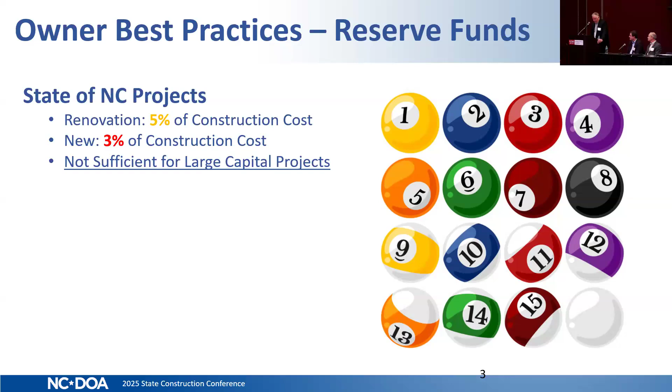A happy face on the scale factor on these large projects is we all know what economy of scale means, right? You buy one Ford F-150, you get a price. You buy a fleet of 100 Ford F-150s, you get a much better unit price, right? Economy of scale. Well, the other side of that coin is the penalty of scale. That's what large projects face.

There are some things that we divide equally from their own perspectives. We divide things like means and methods. As designers and as owners, means and methods are the contractor's or the construction manager's point of view and responsibility. On large projects, it can't be. It can't be. Bring them on early, keep them forever, have open communication, be smart about what you do, because that leads right into costly things that you will never see.

I've got some notes I need to take, yeah.

All of our contingencies are for one purpose and one purpose only: that's minimizing your risk, right? Designers have contingency for things that they don't know, that they know will crop up. They're known unknowns. Contractors have contingencies because market fluctuations and the risk of being a contractor is certainly not any less now than it has been in all of our careers. And the owners have contingency to reduce and address risk factors from the owner's perspective.

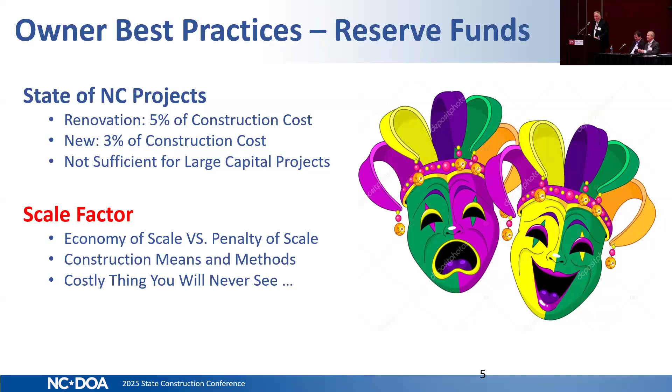One thing you get on big projects these days is maybe the single most innovative and most valuable thing that we ever do, and that's building information modeling, clash detection, and resolution - the software. Typically it's done by the subcontractors and the contractors, and they coordinate it on site.

Our design team did it, and then the contractor and the CMs did it again and did an excellent job. I can tell you that designing your building before it's finished design, using the BIM modeling, will pay you so many dividends. From an owner's perspective, it's errors and omissions, right?

These are big deals. These are 18, 22, 24-inch pipe, chilled water pipes going laterally for 300 or 400 feet. And there's 4 or 5 of them, even numbers, 2, 4, or 6, right, Dave? They never come in odd numbers. Loops don't work really good with an odd number.

Yeah. So think about that BIM modeling done as a basic service, or even as an additional service that the owner was willing to pay for during the design phase. It really makes a lot of difference. It'll give you a better cost estimate, right? It'll give your budget some relief and predictability, because those systems really are expensive and you just don't see them.

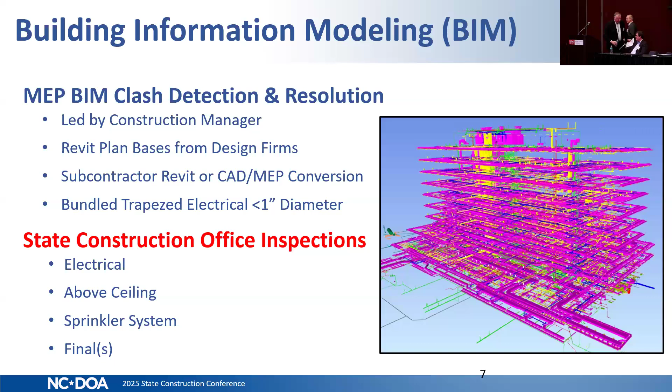Thanks, Will. So from the most simplistic definition of a high rise, you're talking about a building that has an occupied level that's 75 feet, not above the ground, but above the lowest level of fire department vehicle access, right? And so that is all based around where the fire truck is going to come, they're going to park, and with a ladder truck, how are they going to get to that highest level? So it seems simplistic, right? But not all projects are so simplistic.

You have to work with the local fire marshal to understand how they are going to fight that fire. And so while the state construction office is the ultimate say and the AHJ that gives you the thumbs up or the thumbs down on how you've planned something, a lot of the times they will defer to the local fire marshals to make sure that we're talking with them.

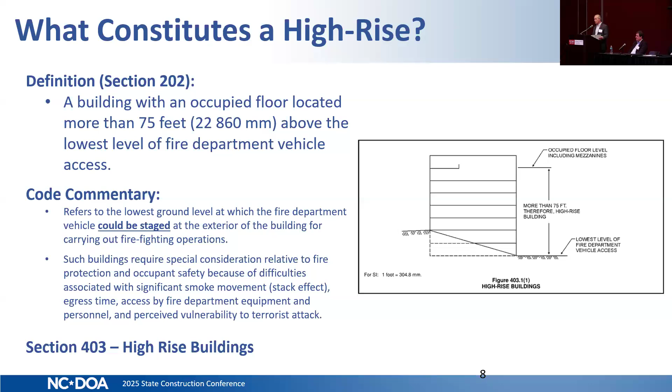As an example, at UNC, the Kenan-Flagler Business School, we did an addition. So the building right in the middle of the slide is the addition. It actually attaches to a parking deck. So the parking deck and the addition become one building, and it bridged over Kenan Drive to the south to attach to the McColl building. At the time, we were trying to figure out were all three of those structures going to be looked at as a single building, in which case it would add a whole other complexity to things.

But to add to that, the parking lot to the east, we'll call that baseline elevation 0. And on the west side of the addition was a big ravine, actually, where a stream came down, the park to the left. That was also at baseline elevation 0. We knew our addition was going to be higher than 75 feet above those 0 baselines.

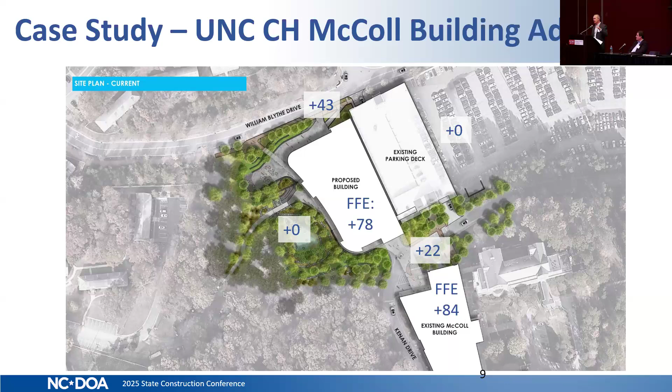When we met with the local fire marshal, they said there's no way that we're going to come and fight a fire through the parking lot. We would come to the road at the top, Blythe Drive, which is 43 feet above baseline, or Kenan Drive between the two buildings, which is 22 feet above baseline. So when you consider that, those trucks are already high enough above ground or above that 0 foot baseline that they can get to the highest level of the occupied floor, much less than 75 feet. So we're able to avoid having to kick ourselves into that high-rise designation.

This is just another look at it. Blythe Drive is in the foreground at 43 feet. They're only going up 35 feet to get to 78, so well below the high-rise determination.

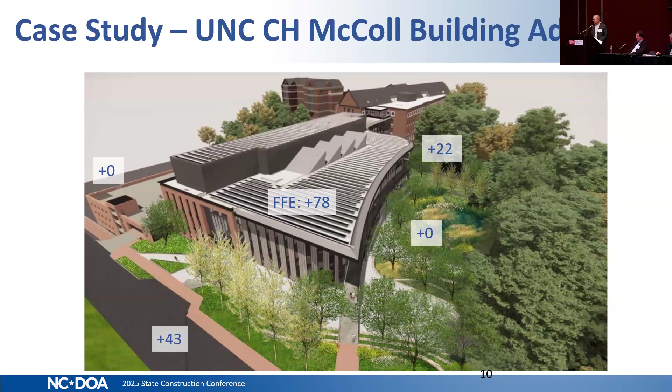So, a group that you may not normally think about as being an AHJ, but they do have authority, and they have a lot of authority. Michael Shumsky referenced this in his comments this morning. But when you've got a high-rise building, you always need to think about contacting the FAA or going through their process. So they have a form, the 7460 application, which is generally required when you're within 20,000 feet of an airport or have a building over 200 feet tall, but not always.

So you go onto their website, you fill out this form, you submit your coordinates. You can get those off Google Maps. You enter your grade above sea level. You enter how high your building is going to be. And then it spits out and it tells you if you're actually required to submit your building for them to review.

So you know you're having a bad day when on a Friday afternoon you get a letter from the FAA saying that your building is 9 feet too tall. And we were 35,000 feet away from an airport, and the building was only 185 feet tall. We had figured out late in the game that the crane was actually going to be over 200 feet tall, which kicked the contractor into having to submit for a permit through the FAA for their crane. And as part of that, they came back and they said, hey, we need to submit the 7460 for the building too. So we submitted it.

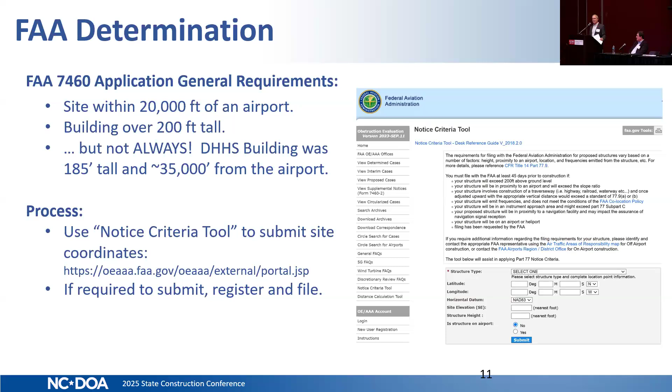2 months later, we get a letter from the FAA that says we're 9 feet too tall. The worst summer ever. Yeah, and then you have to call this guy.

Not fun. But anyways, I'm not going to go through this whole timeline, but after we were notified from the FAA, their reasoning was not that our building was too tall or we were too close to an airport, but that we were going to block some of their radar. You know, there's a helipad right next to where the site is. We weren't sure if that was going to be part of it. It wasn't. But it was because the building was going to block their radar and we were 9 feet too tall. So after we got the notice, 2 months after we submitted, we said we wanted to appeal.

They said it was going to be 45 days. We said, that's fine. 45 days came and went, then it was 2 months. Called them. They said it's going to be another month. Called them, said it's going to be another month. So they do not stick to their timelines. Let's be clear with that.

So it was about 10 months later, after contacting them many times and actually having a meeting with Will and Michael Shumsky to talk through what the issues were, that we were finally given the go-ahead to proceed with the building as designed. We were literally hours away from pulling the trigger and trying to take 8 inches out of every floor to get the height of the building down to get under that 9 feet. So you don't want to be stuck in that point.

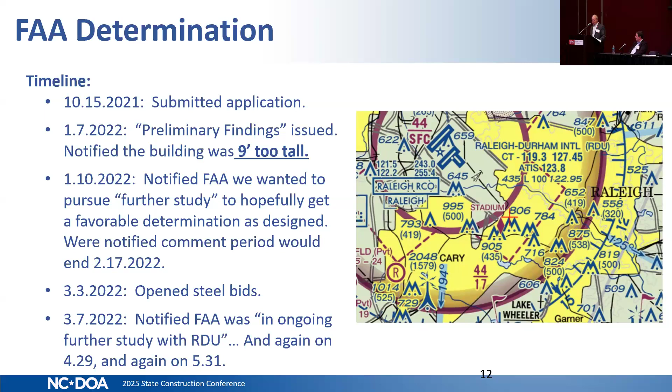Just be sure if you're going to do anything even remotely close to an airport that's got some height to it, submit that form. The fun thing, we were already under contract with the steel contractor going through shop drawings. So if we needed to change everything, it would have been a real big deal.

Again, coordinating with your local AHJ or the local fire marshal on campuses with multiple buildings. DHHS is an example. It's a parking deck, and then the central plant and tower are connected. So 2 buildings on site. We actually looked at those as a single building. You can do that when those buildings are in close enough proximity to each other. But we needed to know where the fire marshal was going to come and fight a fire from.

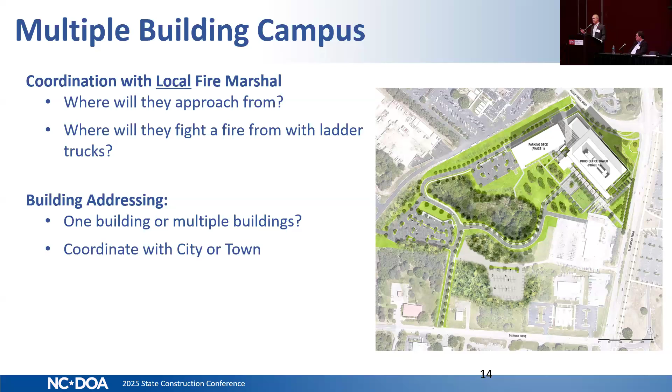And so we worked with them, figured out where they were going to approach the project from, where they would fight a fire from. It helped us figure out where we need to design turnarounds for them, what needed to be rated for fire trucks, where we needed to locate FDCs and so forth.

So they determined they wanted to come in right off Reedy Creek Road. The fastest place that they could get in was in a secure service access area. And so it was right near the fire pump room. And so we had to figure out all the stuff that was needed for them to come and do that.

This isn't unique to a high rise; this is just something that you need to do as good practice with all of your buildings, meeting with the fire marshal first. And they appreciate it. They say, we're not the ones that will give you the final approval. State Construction still gives you the final approval, but it goes a long way.

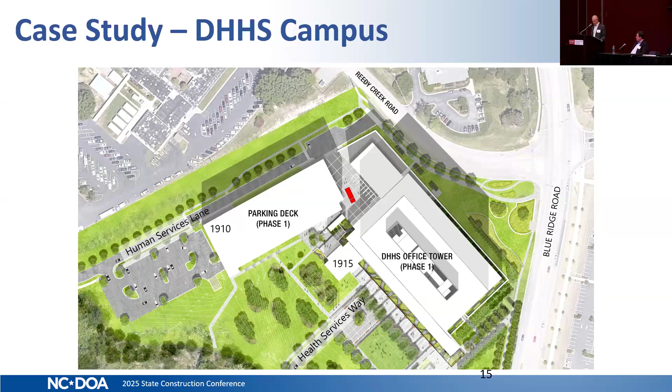The fire command room is required when you have a high rise, and just in general, this is the room where the firefighters come to first so that they can monitor all the building systems, they can control the elevators. So all the rest of the time, it's just a room that sits there ready for an emergency for the firefighters to use.

And the important thing here is also to talk with that local fire marshal to figure out where in the building they would prefer that room to be. And it's not going to be the same answer every time. The city, again, they'll leave it back to State Construction to give the final word.

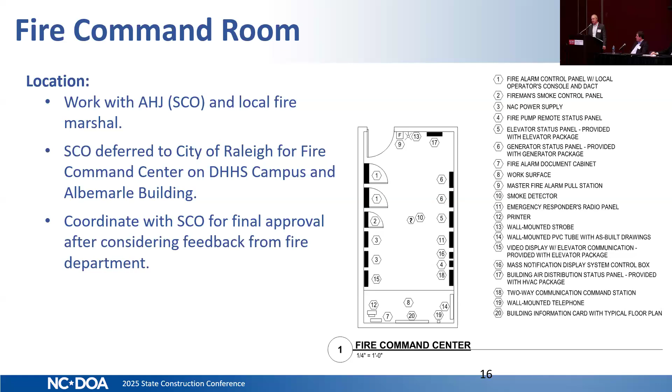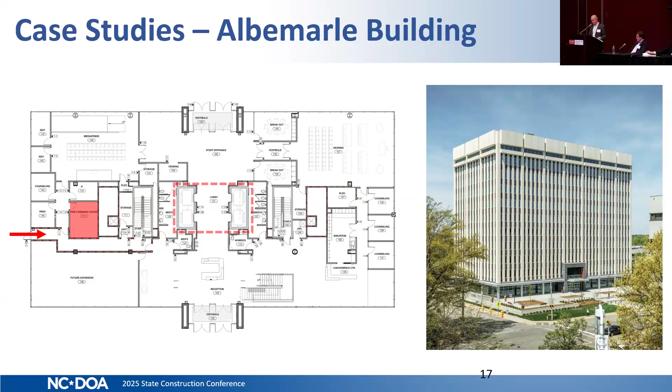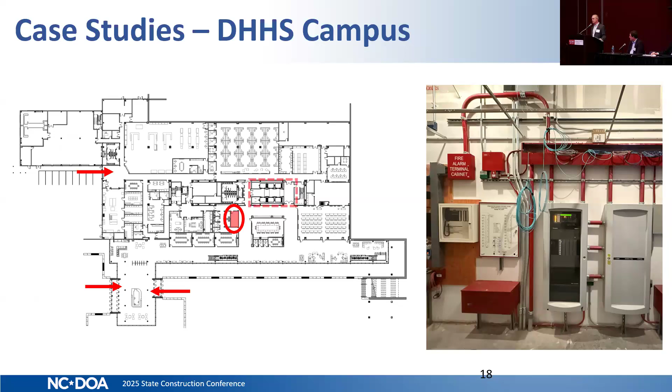All right. So when the fire department arrives at the building, they're going to need to take into consideration what the condition of the building occupants is and how that relates to how they fight the fire. Most buildings that are not high rises, they're not of this magnitude. When the fire alarm goes off, everybody evacuates and you shut down all of the building HVAC systems to avoid migrating smoke from one floor to another.

If it were to be appropriate to leave some folks in the building, of course, this comes into play in healthcare and other institutional occupancies. But in a commercial building, if you were to try to keep some of the floors operational, that has significant implications to how the fire alarm system operates and in turn how the HVAC systems in the building need to respond. In this case, for DHHS, we did not end up trying to keep anyone in the building. It was determined it's appropriate to let everybody evacuate on a fire event.

Now, a large government building has other emergencies that can occur aside from a fire. NFPA actually has a risk assessment that you can work through. It's a work form where you sit down with the owner and talk about what risks, what threats to the building need to be taken into consideration. It can include wildfires, seismic, active shooters, things like that.

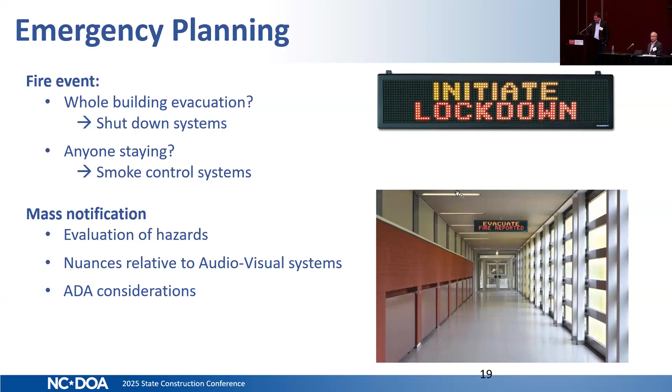All right, this next topic is near and dear to my heart, so I'm going to speak to it for a few minutes. Not specific to DHHS because we avoided some of the issues, but I've done this at least a dozen times successfully, and I have a few hard life lessons related to pressurization systems. I'm going to tell you how to avoid those.

Stairwell pressurization is required for any high rise, particularly for stairwells over 75 feet in height. If you have low rise stairwells that just connect a few levels, they are not required to be pressurized. But pressurizing a stairwell is a very straightforward thing. If you can imagine any door, the gaps around the edges are fairly well defined. The only real variable is the undercut of the door. We as engineers can do some simple math to determine how much air it takes to pressurize that stairwell and keep it free of smoke so folks can evacuate the building safely.

To make an analogy on how difficult it is to pressurize an elevator hoistway - I'm not going to embarrass myself by doing this with my face, but I'll paint a picture with my words. Imagine blowing out birthday candles on a cake, the face you would make, what the air looks like. Then imagine opening your mouth wide and trying to do the same thing. How much force are you going to get from your breath? That's what we're dealing with in elevator hoistway pressurization.

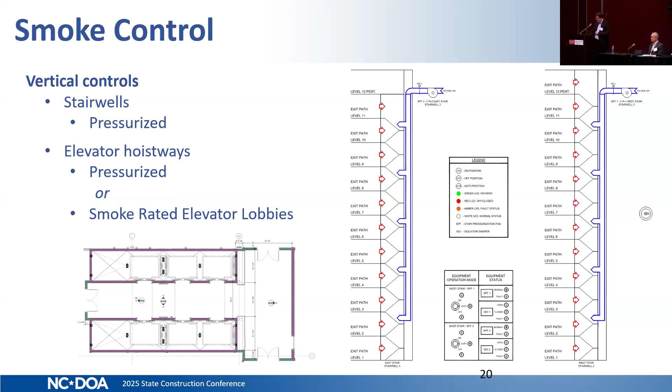This topic is not specific to high-rise buildings, but high-rise buildings are often of the scale and magnitude that they need this type of system: emergency responder radio communication systems. There are so many acronyms for this, it's confusing. This is a way for first responders to talk to one another in the building. It was added to the code after 9/11 when there were transmission issues in buildings.

High rises have three factors that make this type of system likely to be needed. The footprints are often very large, so you have more walls obstructing the signal. They typically have a good deal of glazing with low-E coatings, which also blocks RF signals. And when you're digging out the foundations, you go so far underground that you have basement levels where these signals can be obstructed.

You don't really know if you need this system until you go out and test when the building's constructed, and by then it's too late. So you need to plan for this system up front. You need to identify a spot where the antennas may need to go outside, a room inside that's 2-hour rated where the head-end equipment can go, and vertical pathways for the cabling. If you build in that infrastructure, you're ready to go if the system is needed.

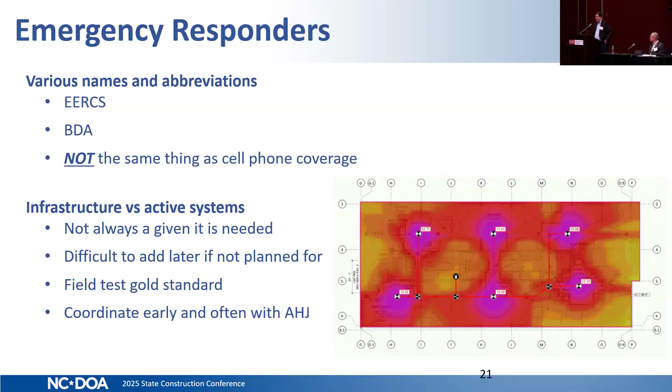One of the success stories of DHHS was a very intentional effort to have the program stack vertically. The core is very efficient. We were able to locate the mechanical, electrical, and telecom rooms where we only needed one of those on each floor plate, which allowed a great degree of flexibility out in the floor plan.

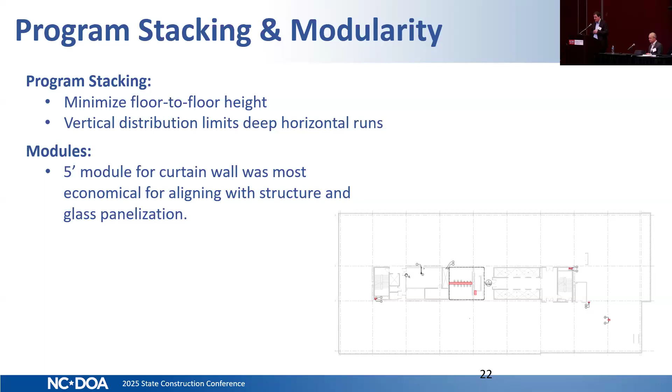When we get to the envelope, specifically your glass and glazing system, you've got options: tempered glass, heat strengthened glass. You can't use heat strengthened everywhere. I think tempered glass, at least in our firm, is generally what we try to use everywhere, unless there are different situations that require thinking differently.

Tempered glass is stronger than heat strengthened—about double. But the interesting thing is that the industry allows for a certain percentage of tempered glass to spontaneously break. It's caused by nickel sulfide inclusions that you can't see with your eye. They get baked into the glass, and when those pieces of glass are out in the field and get hit by the sun and start to heat up, that tempered glass will spontaneously break. You'd think that would fall under a warranty issue, but it doesn't—it's actually industry standard. They write it in their contract, and the owners end up paying extra for it.

The cost difference between tempered glass and heat strengthened glass is really not that big. With tempered glass, you can actually heat soak it—they heat those panes up in the lab to a high temperature and then let them cool down. It's meant to mimic the same conditions you'd get when the sun hits those panes in the field and causes them to spontaneously break. It catches most, but not all. The important thing to know is that the state is really risk averse, so when you tell them there's a chance the glass on the outside of the building could break, that's not something they want to hear.

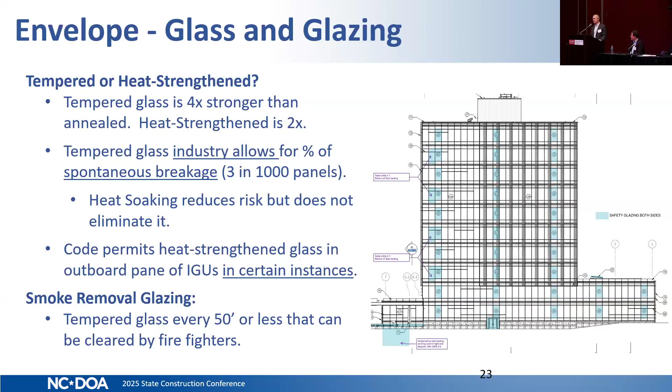Code permits you to use heat strengthened glass in a lot of areas on the outside of the building in high rises. If you see the diagram on the right, the blue panes are the only panes on the DHHS building that ended up being tempered glass, because the rest could be heat strengthened. The tempered glass was required for smoke removal. It's a code requirement, and every 50 feet or less you have to have panes that firefighters can easily crack to get out for smoke removal. So have those conversations early with your client to understand their risk and their appetite for that.

For the record on DHHS, we did every manipulation of the glass envelope available to mankind on this building, because some of you might remember just a few short years ago in downtown Raleigh, we had a state building where a lot of people had fun with it—they had innumerable panes of glass take off and fly to the ground. They did not do it like we've done it. There is no 100% solution. Almost every building has a significant amount of glass, and there's still a 0.3% error factor. So if you have 1000 windows in a large building, it wouldn't be unusual to have 3 of them have an issue with the glass. But we did everything we could—we heat soaked every piece of glass out there.

Especially on high rises, our firm tends to go with unitized curtain wall systems—it's something we do most of the time. I noticed on the Pendo building in downtown Raleigh, when that went up, it was actually stick framed. I don't know the reasoning behind that, but you'll see both done. We think the unitized systems are much better—they allow you to dry in your building a lot quicker because those units are fabricated in a shop where you can control the conditions, so you get better quality. Some things to be aware of: there's a limited supply chain for those, and the firms that can do it have different details. So if you have a basis of design and two equals, you're going to be working with at least three companies to figure out their details and baking those into your drawings.

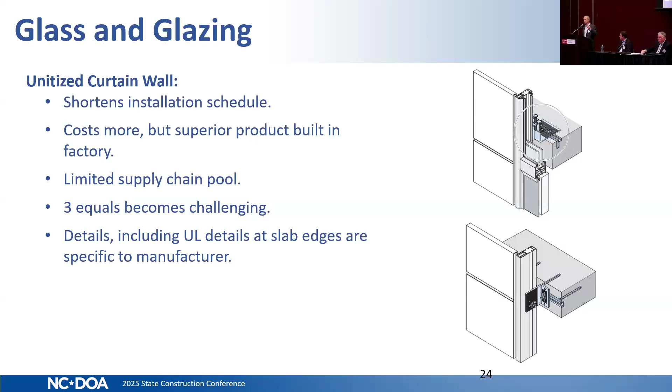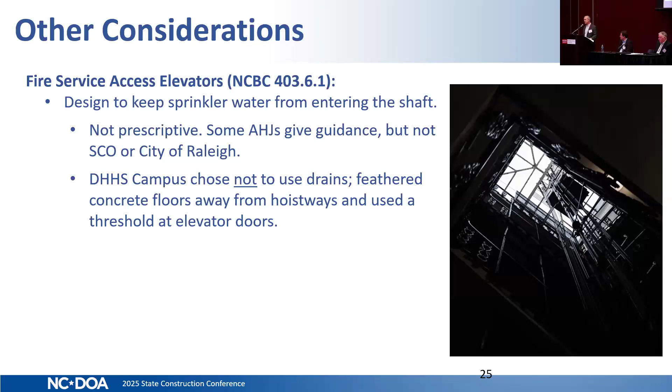I mentioned the fire service access elevators earlier—those are the elevators that return back down to the ground floor, typically wherever the firefighters want them to return to, so that when they get into the fire command room, they can control those elevators and get into the fire service access elevators quickly to reach wherever they need in the building. One interesting thing is you have to design your elevator lobbies so that when the sprinklers go off, no water actually gets into those shafts. So you either have to design some sort of handicap accessible threshold—in the case of DHHS, we tapered the concrete away from those elevators, so subtle you'd never know it just walking through the lobby—and we added a bit of a threshold as well to help with that.

Again, related to egress pathways in the building and systems related to those: if you have a building like DHHS where each floor deals with sensitive information, the floors are locked from the stairwell side. Once you go into the stairwell, you need to work your way down to the exit point of the building unless you have a card giving you appropriate access. When the stairwell doors are secure, you have to have a means of communication in the stairwell in case someone gets trapped and doesn't know how to get out. So every 5th floor in a high-rise building, you have these audio call devices in the stairwells.

Additionally, this isn't just a high-rise thing—this applies to any building four stories or more. Current code requires communication devices in all elevator lobbies. This ends up being a multi-trade coordination issue because it has to have appropriate signage, and elevator lobbies are typically a high finish area. So the design team on the engineering and architecture side has to carefully coordinate where these are located and what the signage says.

Paul, can I add something to this? Yes, sir.

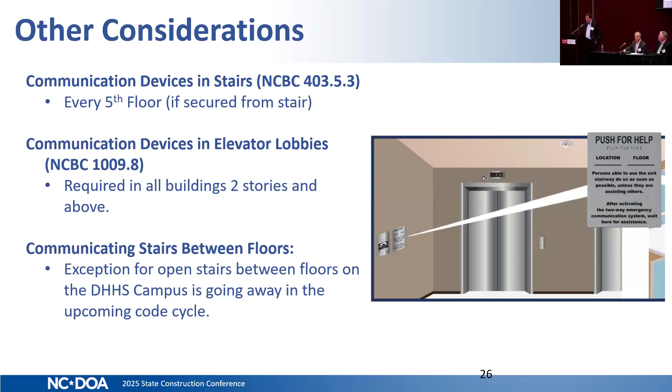This next topic was very much a Bob topic, so I hope he catches our next session. This is not specific to high-rise construction, but large buildings have lots of large motors operating at variable speeds, and when you have that, you have the potential for harmonics in the electrical system. Harmonics, for non-engineers, is a dirty waveform that can cause issues like flickering lights and sensitive electronics not behaving as intended. On top of the variable frequency drives serving our HVAC motors, LED lights actually impart some harmonics, as do all the computers and laptops in the building. So this is a growing problem where harmonics issues are being observed more often, even when a VFD harmonic study indicates it may be okay.

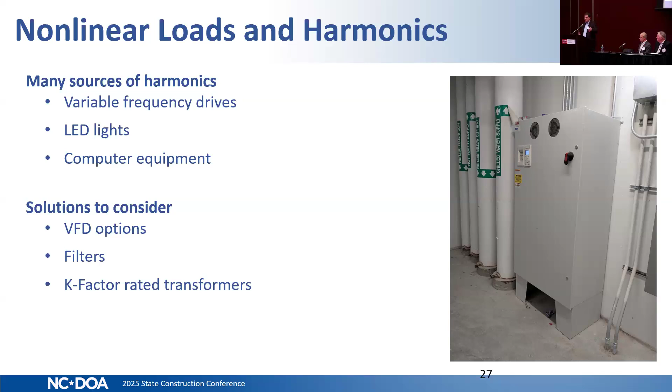So what state construction would like you to do as a designer is a preliminary study. Now, it is specific to the vendor and the drives you're going to get, so of course in an open bidding process you don't know exactly what you're going to get. But you can work with a VFD manufacturer to get specific information for your project, what the layout may be and what the impacts are likely to be to your building, so you can fold these provisions in and avoid surprises later.

Just a couple other parting thoughts before we wrap up and take questions. A couple other considerations: the luminous markings you see in the stairwells of high rises are always a fun challenge. They don't ever look great, but know you're going to have them. They run down the tops of the handrails and are on the nosings and risers of the stairs, so that in an emergency those glow in the dark and people can find their way out.

The other thing is to think about window washing. Most projects, we don't think about that because they can wash the windows from the ground. When you get into high-rise buildings—it doesn't even need to be high-rise, just taller buildings—think about that with your owner. Talk about how they're going to do that. Are they going to hire a service, or do it themselves? What type of platform or chair do they want for that? Because that's going to change the structural requirements and where you put anchors up on the roof.

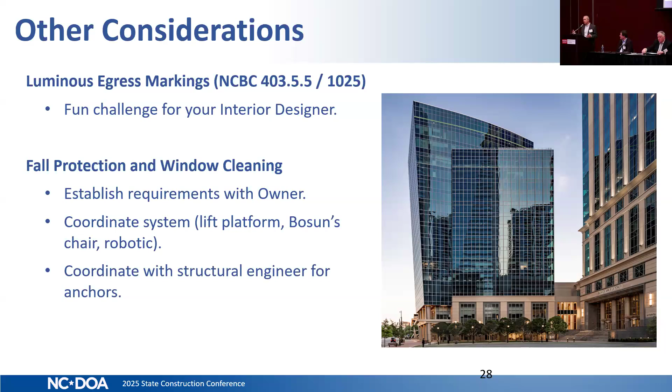Just a final comment: we had the inaugural pre-conference tour yesterday at DHHS, a high rise.

I think they're hoping to do this every year, so be on the lookout for another project tour next year.

Can I get a show of hands? How many people here actually went on that tour? That's awesome, good number of people. Thumbs up. Was it a good tour? Do it again next year.

All right, not the same project. No, different project. No, next year we're gonna have somebody else volunteer a brand new building for your enjoyment.